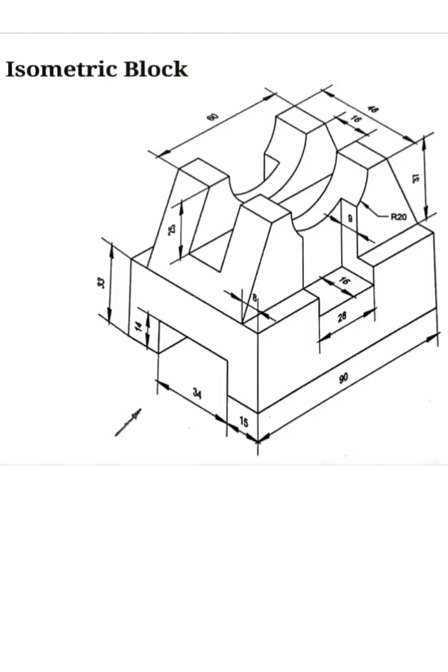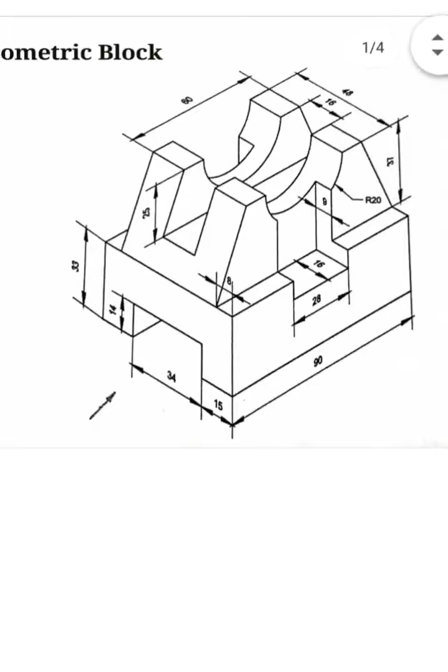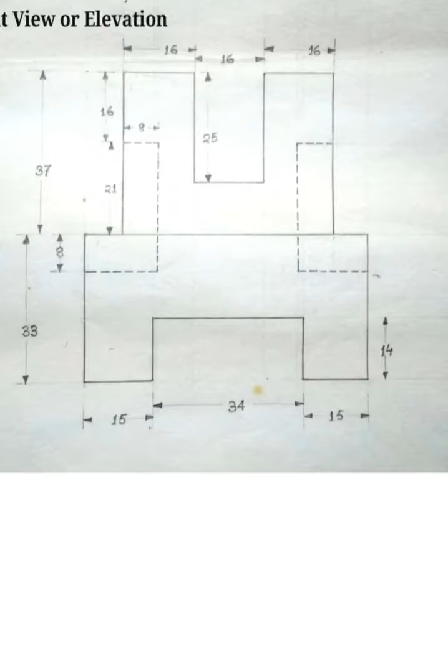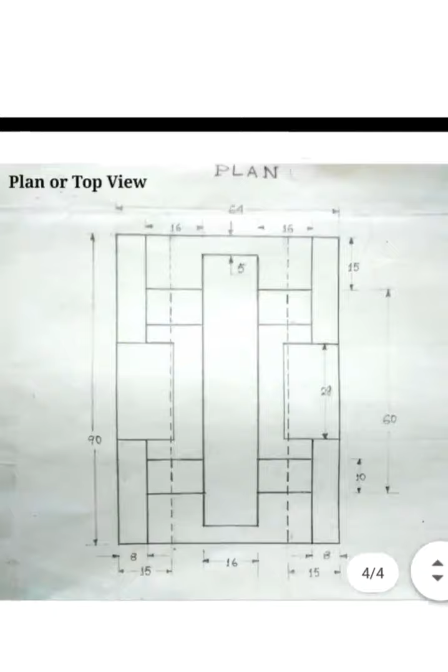After that, the top view will come under the front view. So in this case, this is our front view, sorry, this is our top view. Look at this view very carefully. Here we can see the total length and width of that object, but we are unable to see the total height of that object.

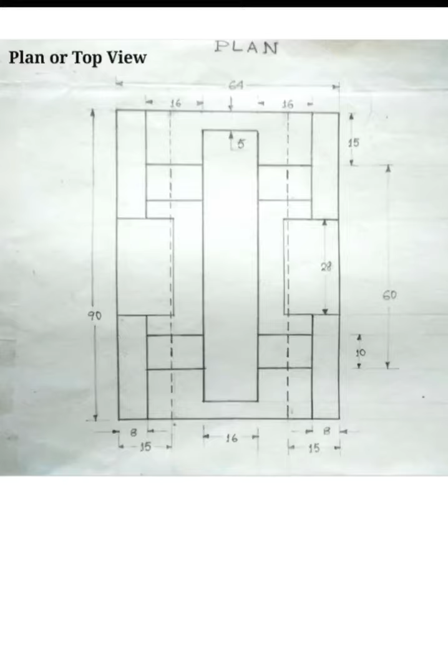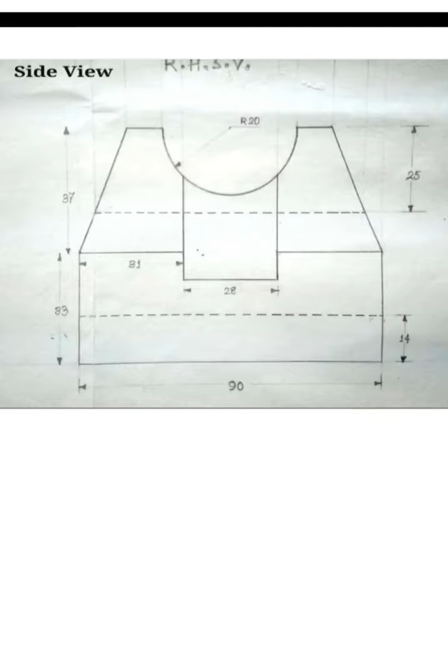And after this plan or top view, we will draw the side view of this object, just to the right side of the front view. So this is our side view, or simply right hand side view. We can see the width 90 millimeter and the total height of that object from this side view, but we are unable to see that arrow marked section's length 64 millimeter from this view.

Look, the arrow marked section's length is total 64 millimeter, as we can see more clearly from our front view, which is unable to be seen from our side view.